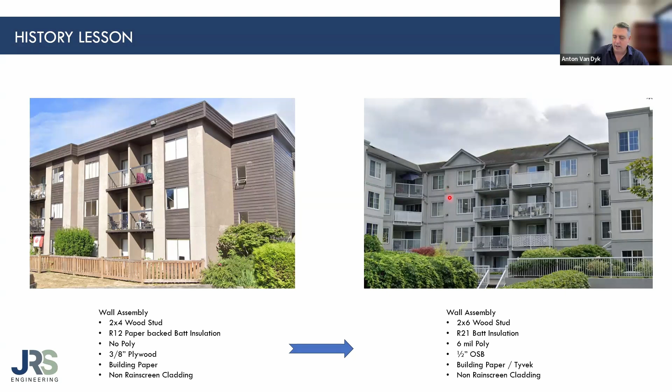What happened is in 1978 we had this thing called the Measures for Energy Conservation in New Buildings, which basically started looking at buildings saying, hey, we need to make them more energy efficient. Does that sound familiar? Does that sound like what's coming to our codes today?

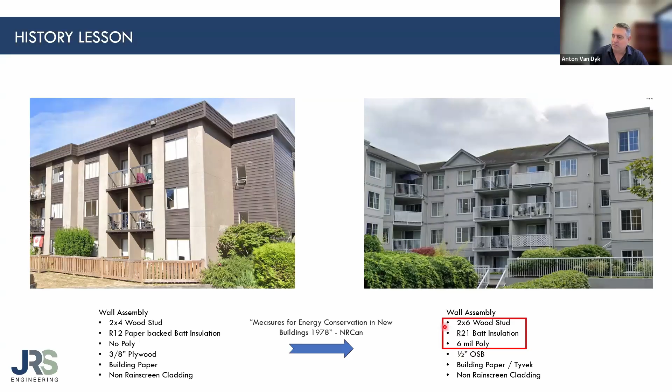In BC we have the energy step code, and the national code has the tier code coming. There's a similar transition happening where we're looking at making walls more energy efficient. We're putting more insulation in them, which in essence is changing the way the walls perform.

These two buildings are within probably 3 or 4 blocks of each other, so they're in the same climate zone. The building on the left has bad systems, but there's so much energy flowing through the walls that its drying potential is higher than its wetting potential.

I bring this up because we've had energy codes now in BC for probably 5 or 6 years that have changed how we insulate walls and deal with air barriers and moisture barriers. But the new topic everybody's talking about is embodied carbon.

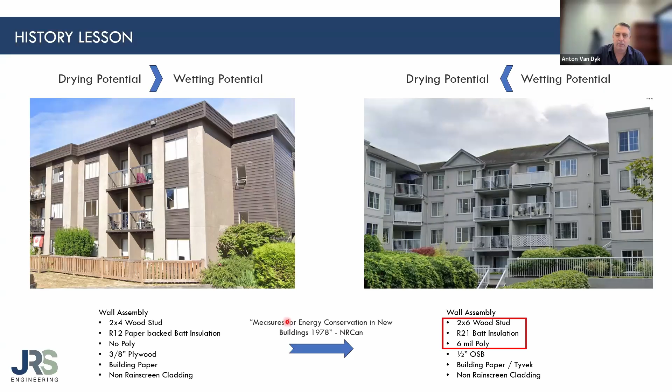When I talk to certain influencers in the world of reducing embodied carbon, my cautionary statement is: could it have an impact on increasing or decreasing durability, making a decision on a durability scale that we have to focus on? So the whole purpose of this slide is to recognize that one change somewhere can have a ripple effect down the road that we may not be paying attention to.

Looking at the history and evolution of windows—wood windows in buildings from the 50s, then into the 60s and 70s where aluminum starts to come in—you can see the transition of a window from a functionality perspective. Mullion thickness was based on operator balance weights, then with aluminum you could get thinner frames. Moving forward to today, windows have just gotten bigger.

The window-to-wall ratio has never been as extreme as it is in today's design. And we've got energy codes looking at lower conductive building materials, which generally pushes toward synthetics and plastics.

We're moving away from the stiffer, more durable products. Our windows have basically become an architectural feature, not a simple aspect of function. And that's where I start to dive into the idea that now they're architectural, so there's a whole new level of influence that an architect is having on the product you're supplying and providing for a building.

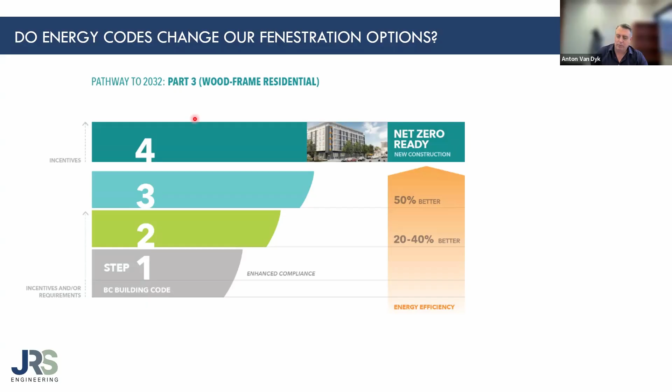It's triggering interesting, unique conversations. So looking at BC, and this is from the rest of the country, from the tier code, I'm going to use a part 3 multifamily wood frame building concept here. When we look at the step codes in British Columbia, we're hovering between step 2, 3, and 4. Why it's a range is code minimum in BC for multifamily buildings is step 2. Step 3 is the most commonly seen step in the actual specifications we see today, and some in step 4.

The reason we see a variable aspect here is it's municipally driven. Certain municipalities will adopt a higher than code minimum step code, depending on their perspective of climate resiliency, and it's also tied to zoning. So you get situations where if somebody upzones a lot for higher density, the municipality might say, well you can, but it needs to be step 4. I've also seen projects where CMHC has come in and said, we'll provide funding to build this rental building, but it must be step 4, not code minimum step 2.

It changes the dynamic. So what happens here is, in my traditional presentation for architects, I'll always ask the question: what is the U value and solar heat gain you'll find in this range? And now I've just added durability, because I think this is the next conversation we need to start having. So what type of products fall into this range?

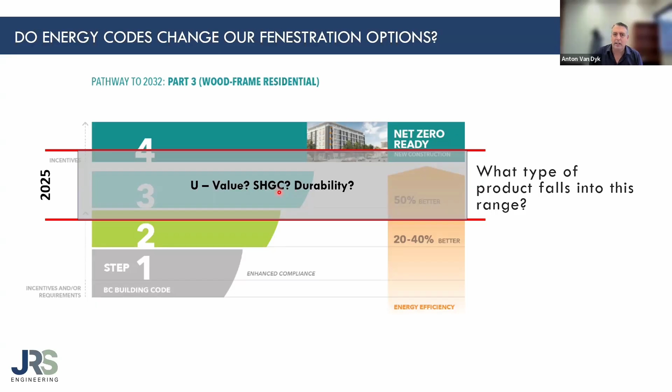You're developing it for relevancy for the next decade. This is the interesting conversation. What's changed from probably 20 years ago is the rate of change. Change has always been in front of our industry, but the rate at which it's changed is at a pace that we're not typically used to.

So getting into energy calculations and where we go with this, energy modeling, whole building solutions. If you've ever worked with an energy modeler on a project, you'll start to realize that they're dictating specific components that go into a building, in particular to hit the thermal energy demand intensity, which starts to define higher performance windows. So this is where you start to see the influence on why certain types of windows are being specified on a building from an energy perspective.

It's the energy advisor, and it's often done very, very early on a project, at the zoning stage. So you have, as a manufacturer, very little input and ability to provide feedback to design teams about what can or cannot be done. This is why, in my view, companies need to put a high level of effort into business development, not from selling what a product looks like, but from meeting with architects to update their understanding of specifications.

If you go back 25, 30 years ago, before Google, every architect had a spec library. They typically had a spec writer, and product manufacturers had technical representatives that went door to door into these architects' offices, updating the binders and informing them on what was new about their product and what they were doing. You had face-to-face communication. That culture's gone in our industry.

Architects simply Google. And I hate to say it, when you look at Google and AI, it pops up: yep, we have a solution for you. Okay, go design it. But the background research that needs to be done, this is where I get into this idea of how would you define the term high performance.

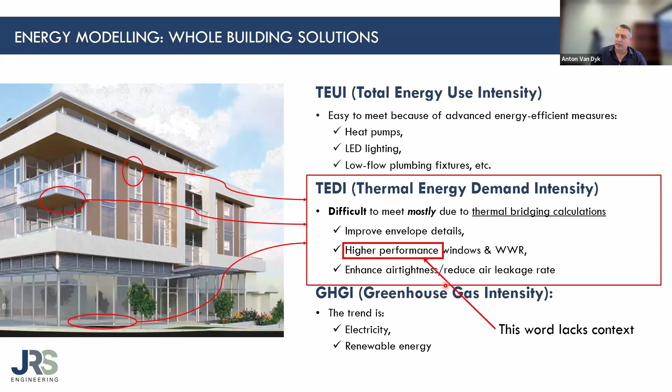So I did a presentation a few years back and asked an audience of engineers and architects, what's your definition of a high performance window? And I kid you not, one person said high solar heat gain, and another said low solar heat gain. So what is it? My answer is, what's the right window? What's the right window for the right building, for the right design, for the right implementation, for the right goal and the right expectation?

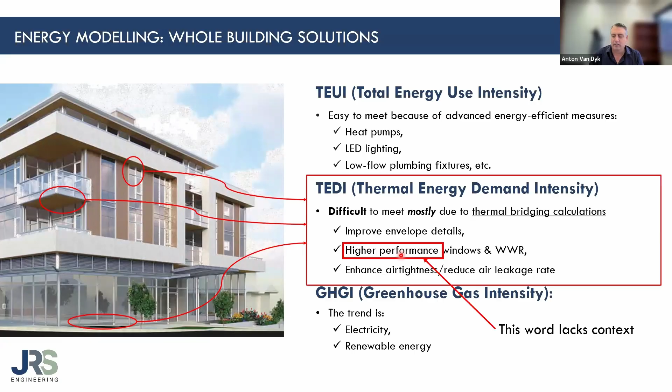So we got to start getting into this idea that high performance windows is not necessarily a single solution, because some people are going to start pegging low embodied carbon windows as high performance windows. But on a 20-story high rise with high wind loads, is that appropriate? Could that be appropriate? And what does that look like? So we have to look at it in a world of context.

I did a post a while back on LinkedIn, and I got this really cool comment back from somebody regarding energy codes. It talks about the focus of total energy use as a target for design and construction—that's basically the definition of energy codes, energy step codes—creating a significant number of less than optimal choices. It's acknowledging the fact that the products we're used to using today may not be relevant for the future.

Knowing how much gas a truck uses in a year does little to understand what load it can carry up a hill and safely descend it. And if you've ever tried to tow a trailer through the Rockies, you'll know it's important what vehicle you have towing that, from a safety perspective. There's a number of times you can drive through the Okanagan or the Coquihalla Highway here in BC, and you'll pass a pickup truck with a flipped over trailer on the back because it was basically not capable of doing it.

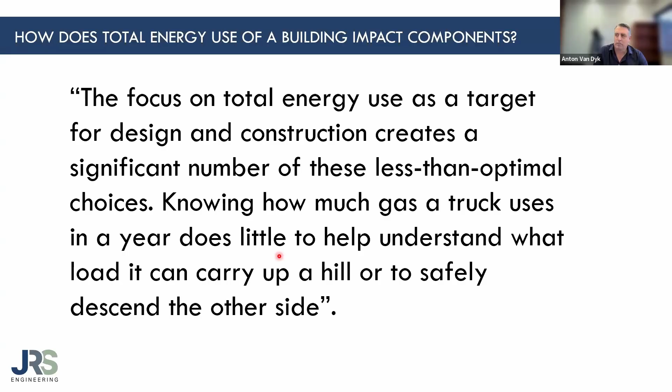This is acknowledging the idea that total building energy code calculations do nothing to understand the products we put into certain components and what happens to their level of durability. It might work for a calculation—we've all seen this with solar heat gain. It works great in calculations for total building energy efficiency, but it may not work for the component. So what's changing? What do we have to factor in?

Being born and raised in BC and growing up in this region my entire life, I can assure you that in the last five years, we've seen events happen in British Columbia that we have never seen before, that I've personally never experienced in my entire life.

So key aspects—I took Victoria's average temperatures, highs and lows: an average low of 3. Kamloops, an average low of 5. And then I get into the extremes.

In June of 2021, we had an interesting event we called the Heat Dome. We've attributed a significant number of deaths to it. It triggered code changes and ideas about how to regulate temperatures in houses. Those of us in the window industry know you don't always have to put air conditioning in a home—you can deal with it with low solar heat gain glazing. When I heard on the news they were trying to codify air conditioning in buildings, I was frustrated, because there are more pragmatic solutions with glazing systems and shading. But not everybody wants to react from that perspective.

We saw up to 40 degrees in the Lower Mainland and Victoria—oceanfront cities that generally have mild, temperate climates that don't swing that high. And in the interior of British Columbia, we hit 50. I was actually camping with my family in that range when it hit 50, so I personally got to experience 50 degrees. Not a fun temperature when you're in a tent trailer with no air conditioning.

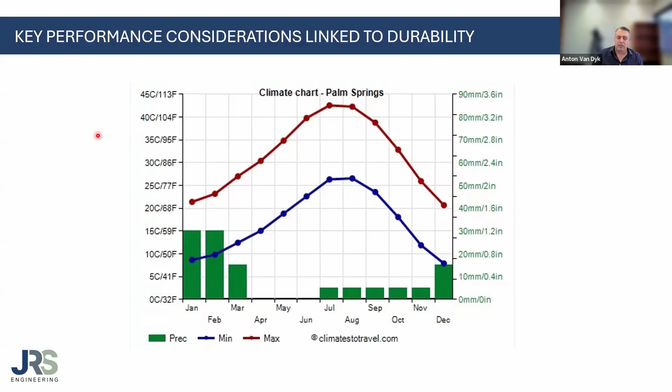So I'm going to bring up Palm Springs—I'll show a slide after that connects the dots—but we are getting Southern California-like temperatures in Vancouver, which in my entire lifetime we've never experienced. That's a new thing. This is the change upon us that's going to start to factor into durability and how the things we put into our buildings are going to perform overall, looking at it from a pragmatic, holistic, big-picture aspect—not just a calculation that software tells us will work.

So examples of performance considerations linked to durability—we're going to get into the guts here now of specific examples of what we're seeing today. These are actual real-life situations that are occurring, from multiple projects.

They're reflective of multiple products. It's not discriminatory towards any specific aspect of a manufacturer or anything. I just want to get that out there. We have to have this conversation. Architects, engineers, and specifiers who are responsible for the material they specify on a building need to become aware of the limits and boundaries of that product based on the environment it's being put in.

The best way to look at what works and doesn't is to look backwards a little bit in the last 5 years, to see, in those extreme environments that the products have gone through, can we use that as an example of what we might face into the future?

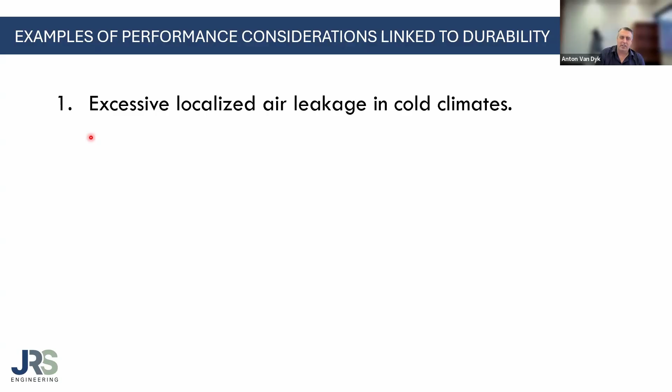So the first one I like to look at is excessive localized air leakage in cold climates, and high solar heat gain glazing damaging window frames.

This is a bit of a regurgitation of a previous tech talk, so I have some content there. But a lot of architects and engineers are not aware of this issue. When I share the image from a previous tech talk with energy advisors on what a 0.4, 0.45 solar heat gain coefficient can do to a window, they're shocked. They have no idea this is a possibility, which is something to consider when we start interacting with designers.

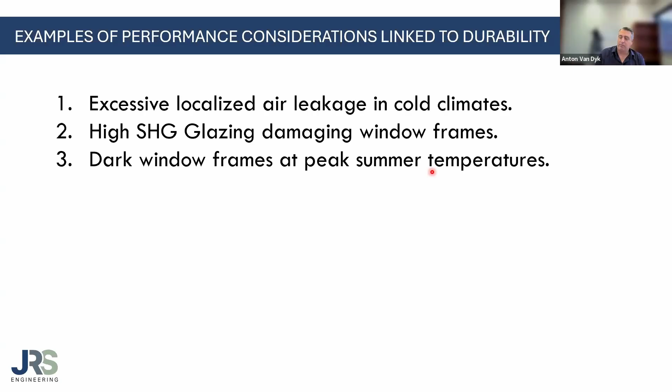Dark window frames at peak summer temperatures — this is going to be a big part of the conversation. This is because windows have become architectural versus functional in our transition through the processes. What happens when you put a dark color on a window frame? What type of window frame is it? What is the color? What is the material? And what happens at 40 degrees Celsius is really the big question.

I have two other topics I want to open up into conversation, but this thing's going to turn into 4 hours if I get into this. But we need to start having more conversations about the use of Surface 4 low E in cold climates in lieu of triple glazing. What is the boundary? What is the limit of Surface 4 low E from a condensation perspective? That is a future conversation.

There are too many designers and specifiers in the industry who are black and white on this — don't do it, or do it. I put it all in my house, because I was really frustrated with one designer who was trying to influence that Surface 4 low E should never be used. But in a mild climate, it has very significant relevance.

And in the conversation about embodied carbon, would a Surface 4 low E be better than triple glazing from a carbon perspective? I think so, because it's less glass. But in cold climates, we have to be careful. That's where I see the common mistake made — oh, we did that on a building in Vancouver, but then we do it on a building in Kamloops where we start seeing minus 25. So those are the kind of things we need to know — what is the boundary.

And there are actually tools we can use now. Cardinal developed a chart and presented it — I remember seeing it like 15 years ago, on how to determine center-of-glass condensation temperatures using different low E coatings to determine condensation. Then you use that with a psychrometric chart, do your dew point calculations, and you can predict condensation scientifically.

Interestingly enough, I was reading a bunch of thermal modeling reports from Intertek yesterday, and they had a disclaimer about condensation resistance — being it's a simulation, not an actual result, and it doesn't factor in convection currents, airflow, and all these other things you work with when it comes to condensation predictability.

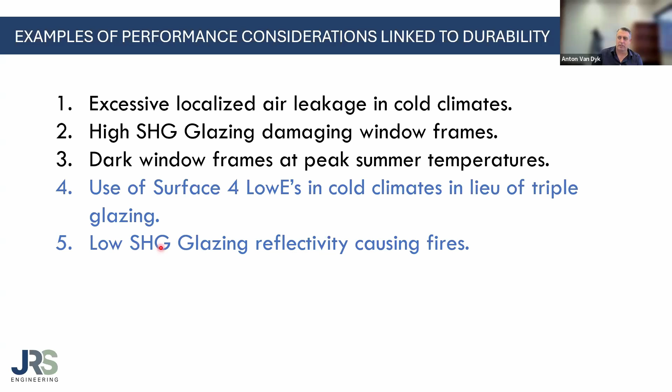So first, excessive localized air leakage at peak winter loads. Common issues with doors, and I'm really going to amplify the swing door industry issue, something I learned when I transitioned work into the Calgary market, where you see sustained cold temperatures. With French doors, and in some cases patio doors, you may have a situation where your door tests and meets an A3 air leakage level. Great. It meets A3, it's got an air leakage rating of less than 0.5. We're all good, except 80 to 90% of the air is leaking through one small location.

And that's what I think most everybody looks at, the holistic performance aspect of the product. But what if all of the air leaked through the astragal at the bottom of a French door in this one location? For those of you in cold climates, you probably already know the answer: customers complain they got ice buildup in certain locations of the door and the door won't open or close. So this is a similar conversation about how industry standards don't necessarily provide us with the understanding and logic that could come with durability and the expectation of durability in that specific climate. Not a huge conversation, but something to pay attention to when you're selling a product from a mild climate into a more extreme colder climate.

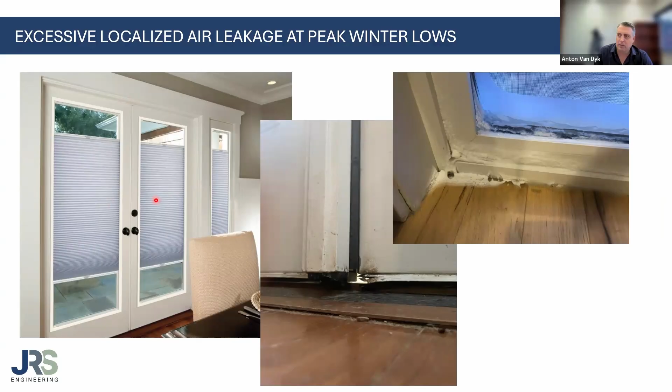What I learned in the Calgary market is a lot of developers will put double outswing French doors in homes, and then five years later the homeowner will take it out because they don't like it. They'll put a solid mullion in, do a fixed panel and only have a single operable. They won't use the French door because there's so much localized excessive air leakage with French doors in cold climates.

They don't work. Going back to this conversation and the story I like about this one - I'm going to paraphrase it because I don't know the exact details, it's all second, third hand information - but this idea that this home is built by a developer.

It's built and sold and designed as a high performance home. Let's say it's got solar panels, extra insulation, it's in the upper levels of the step code, and it's got high solar heat gain. So the design might be 0.40 in the energy calculations, but most of you know, can you actually get a 0.40 solar heat gain window? No, you're probably selling a 0.45, a 0.48. In fact, some windows I've seen come through at about 0.52.

So the energy advisor might have said 0.40 or higher, thinking higher is okay because more heat in the winter, the better. What's wrong with that from an energy calculation perspective? But the more heat coming through, is that okay for the window?

So what happens here is the homeowner moves in and says, hey, my air conditioning is on from May to October. This is odd, my home is overheating, I can't do it. They start looking at their energy bills in the summertime and go, wow, we're consuming so much electricity for air conditioning.

And then someone comes along and says, hey, we can sell you these heat reflective blinds that we can put on the inside. Or in my own personal case, my wife used to work the night shift in the ER and she'd come home at 7 in the morning and sleep from 7 till 1, 2 o'clock.

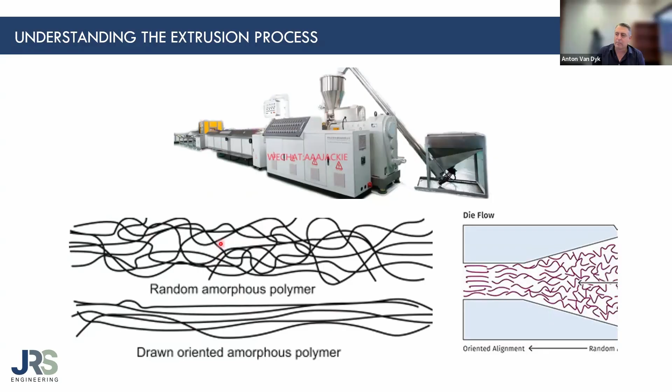And so what happens when you heat it up to a certain temperature? There's melting temperatures, there's softening temperatures, there's that plasticization temperature that comes into it. And people will use terms like reversion, replasticizing, and go from there.

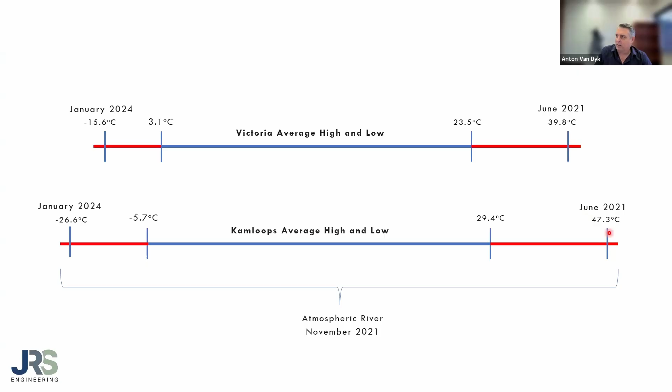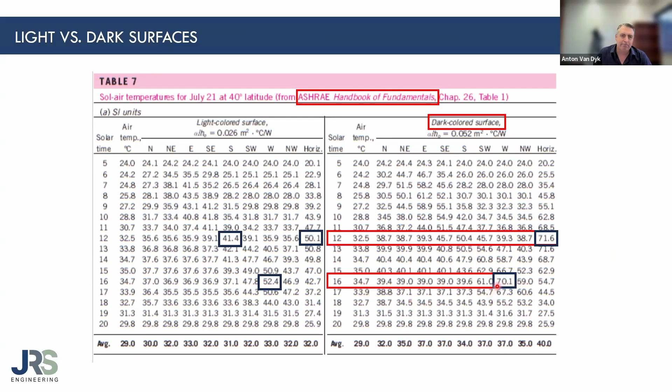Now, what happened in BC is we started seeing 40-degree temperatures in the Vancouver region. In the interior, we started seeing 50. So this chart is at 32.5 and 35 degrees, so it caps out—it's not giving us the full spectrum of what can happen, but we could probably plot this on a graph and use it to project what it could be. So what happens if at 35 degrees we're hitting 70, at 40 degrees could we be hitting 80? That's really the interesting conversation we need to start having, because these environments are existing in our climate.

What a lot of engineering firms are doing, and it's really big in British Columbia, is driven by a lot of the warranty insurance aspects that we deal with because we had building envelope failures over the last number of years. So we have a warranty insurance criteria linked to certain timeframes, and the big one is a 5-year warranty component linked to water ingress. Our firm, for example, will get hired by condominium owners and we'll come out and do that 5-year warranty review.

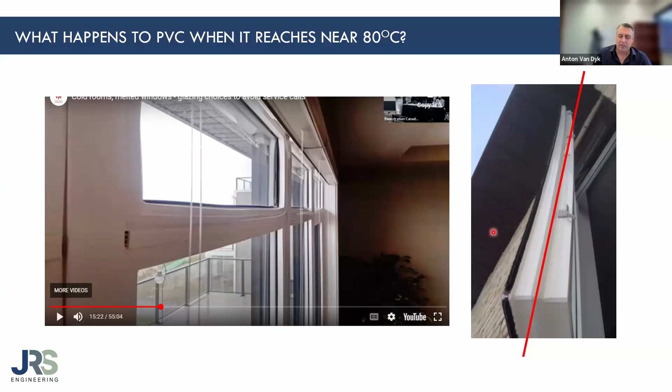What's happening is the window heats up on one side but not the other. You have a controlled condition on the inside and an uncontrolled condition outside, getting 40 to 50 degree ambient temperatures. That heats up one surface, the vinyl reverts, releasing tension in the polymer, causing it to shrink. This causes the sash to bow in this direction, which makes the weather stripping lose compression and gasket seal in this location.

This is where we start having the conversation about durability versus performance—can we link the concept of whether the window is performing for air tightness and water tightness as intended once it goes through a heat event like we saw in June of 2021?

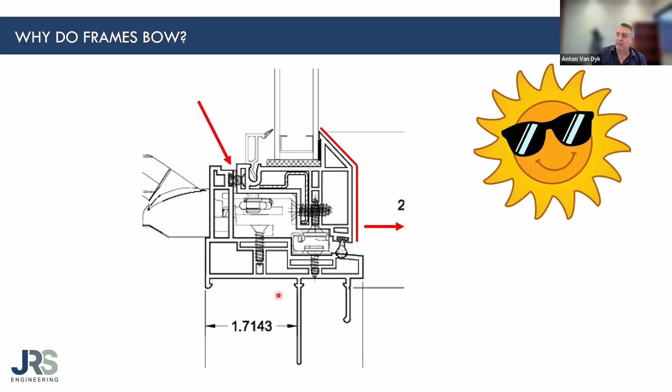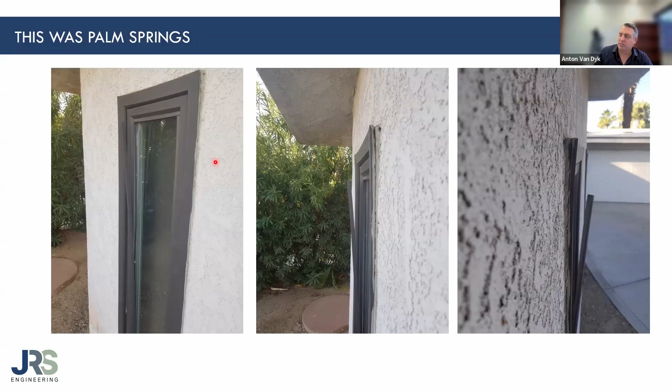I think an important part of this is it's not about duration of impact—it's about whether it got exposed to that temperature, and how long a product can be exposed to that temperature is an interesting question to dig into. Is there a sustained component to it?

How do we fix it? How do we address it? How do we prevent it? And is this a conversation about durability? This is where I define durability as relating to air and water performance—would this have an impact on the air and water performance of the building?

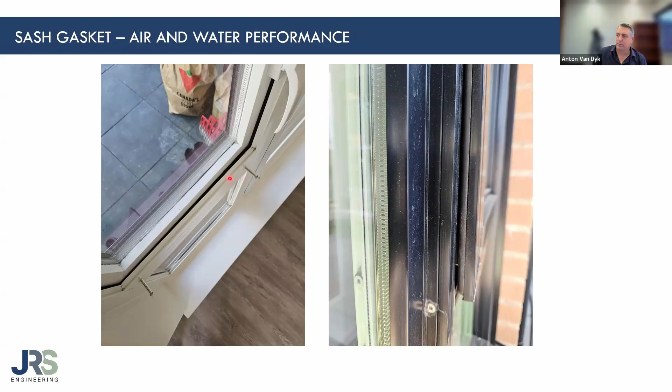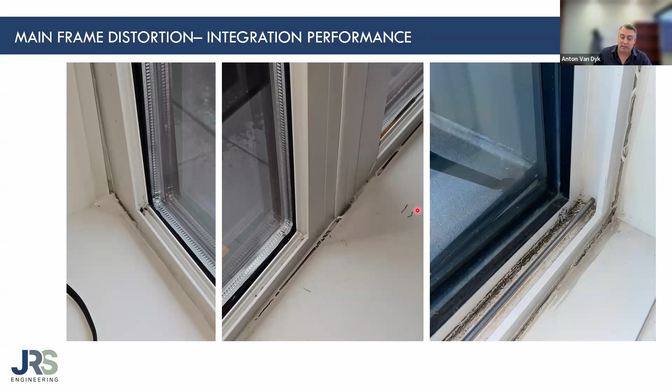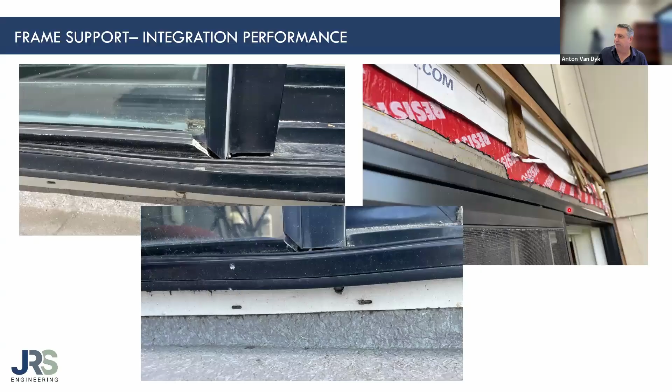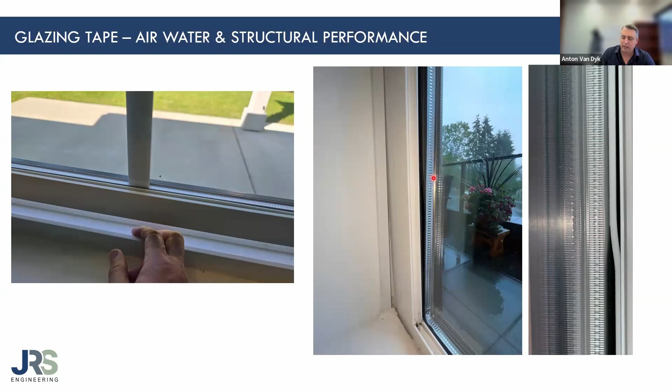In situations where the window has to meet guard load, in this particular project there's a concern because calculations were done to determine whether these windows would currently meet guard load. They don't. The piece of glass is 4 feet wide by 6 feet tall, and it's an occupied building. If someone were to lean up against the glass, there's a high probability the glass could fall out of the frame because the glazing stop would not be considered structural. The glazing tape is actually acting as a structural adhesive from the glass to the frame.

This is a downward version of that vertical slider where the glazing tape's lost adhesion, and you can see the bow in the frame, and it's causing the glazing tape to pull off of the frame.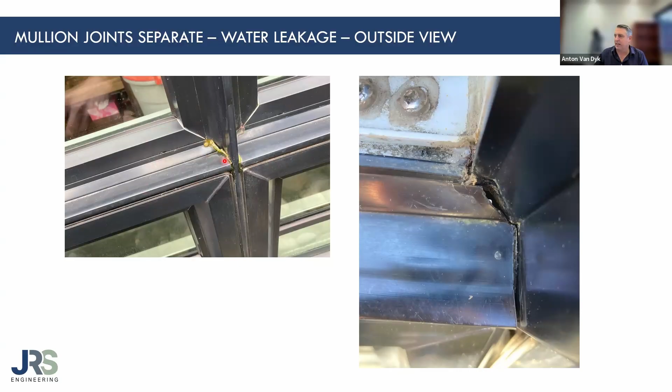In this case, a water test was done after the fact. The windows are relatively older, but it's trying to determine whether or not that gap opening up is the cause of what's going on here. You can see in this situation, on the inside the gaps are tight, but on the outside the gaps are open.

This is the same window, but you see the staining, the rust staining, which is an indicator that water's getting into the mullion where there's steel, causing corrosion, and then water's dripping out. In this case, we drilled a hole in the underside of the mullion and water came pouring out.

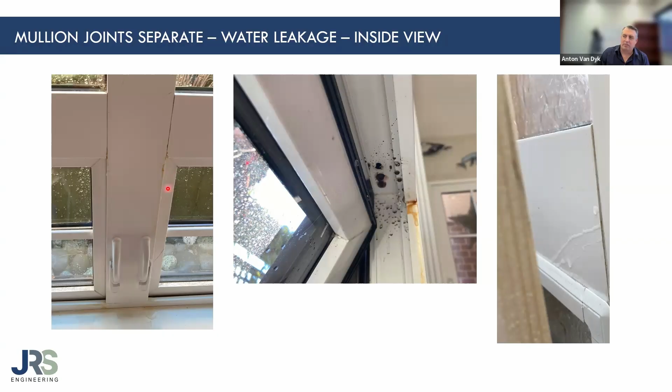And this is the active leak occurring through the mullion during the actual water test. So this is where we start digging into the idea of whether these issues of durability and performance are linked.

A comment I get from a lot of people is this was old technology. Some of the black on these windows was the technology used 5, 8, 10 years ago. This is a 3-year-old window. When I started talking about this, a colleague of mine said, 'I just bought a unit in a complex in North Vancouver, and these are the windows in my building, and the building is only 3 years old.'

So we're starting to see situations where product that hasn't gone through the heat dome, exposed to 40 degrees, is still reaching a high temperature causing this level of distortion. If you put your hand against this, the air leakage you'd feel on a -10 winter day is quite excessive. So you can link the connection between excessive localized air leakage in cold climate with potential sash bow occurring from summertime heat, and that connection between the two.

So what can change? What do we need to do to address this? And where does the conversation need to go?

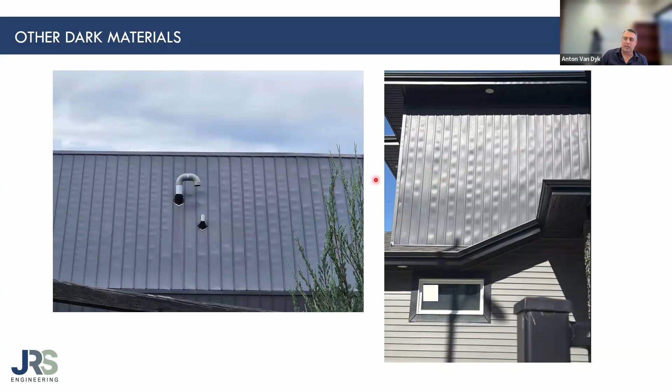So to wrap this up a bit, how do we specify finishes? How do architects determine the finish of a building? Is it a color? Is it a material? Or is it a system? I think this is starting to open up the conversation about durability, because if you're specifying a finish as a color, you're not talking about durability at all. And I would say that is the current state of our industry. We're specifying everything as a color. We have to start focusing on a material, or as a system, and get creative with what that system is.

This is where we start talking about the next decade being upon us. We're going to start seeing extreme temperatures, in the cold and in the hot. So what is the system that we're doing that is going to be able to manage this? This is where I go, how we fixed leaky condos in British Columbia. We didn't make buildings stop water from coming in. We said we're going to manage the water that comes in. We're going to expect buildings to leak, but we're going to drain it. We're going to increase the drying. We're going to flash it out, and we're going to address it.

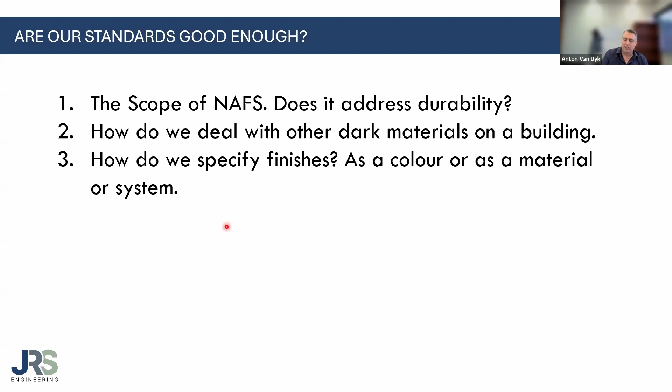And it became a system, not just a material like a space shuttle that's going to stop every ounce of the environment from coming in, because we know that's absolutely impossible, especially from a cost perspective. So focus on this idea of a system.

So when we get into color, how do we specify windows? Well, the color of a window is generally specified at the development permit stage. When I talk to specifiers and ask how they're determining the right product for the building, a lot of times they say they depend on the window manufacturer to provide feedback on what their product can and can't do. Then I talk to a manufacturer and ask how they decide what product to sell for that building. They say, if an architect specifies it, we'll provide it, because we assume it's going to meet their expectations for the building.

But what happens is we're picking the color of the siding and the windows at what we call the development permit application stage. How many window manufacturers do you think are brought into that conversation at this stage? This happens probably 3 to 5 years before a building is even considered for its functionality, materials, and components.

So the color's set, and it's linked to marketing and housing trends. What's the biggest housing trend right now for bathrooms? Black faucets on everything. What was it in the 80s? Probably gold. What was it 20 years ago? Satin nickel. So housing trends are dictating a lot, but housing trends and marketing have no conversation about durability. Back in the leaky condos era, more money was spent on marketing condos than on the conversation of envelope durability. That was a red flag in the industry, and we have to be careful when these conversations come up.

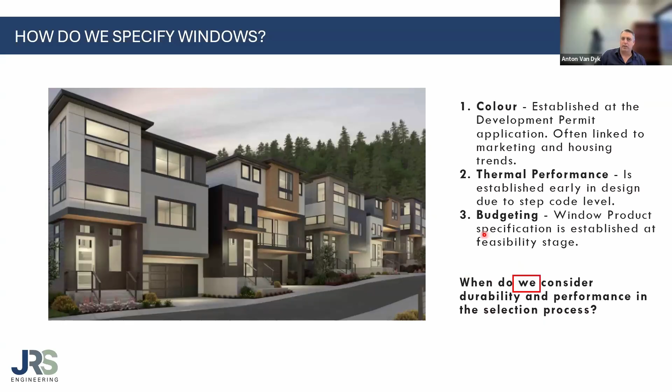So, can we test for this? In conversations I've had with colleagues who do a lot of high-rise curtain wall, window wall projects, 20, 30 stories, with products coming from all over the world, newly developed products, we have this thing called PMU testing in the commercial sector, where someone will spend $100,000 building a 2-story window wall system, bring it to a lab, and do a whole gauntlet of tests, from environmental tests to thermal cycling, seismic tests, testing before and after. So you can basically put a product through it.

Interestingly enough, there's an AAMA 1506 test that deals with laboratory heat buildup effects on fenestration products. It is literally identifying exactly what we're seeing in the industry with products that go through this issue. You have a situation where windows are tested at a 24 degree interior temperature, a 43 degree exterior temperature with an infrared lamp, and the result is to measure the amount of bow that occurs in the frame.

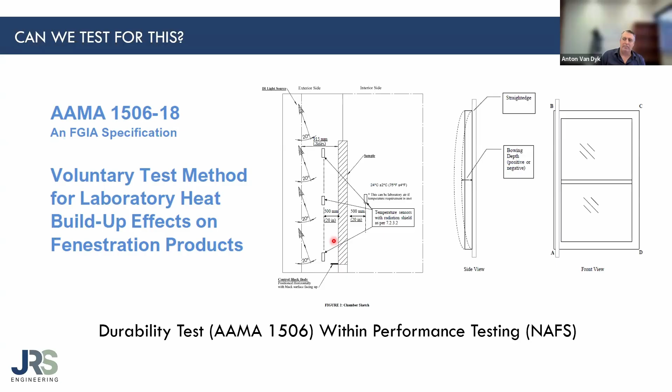So one of the things we're looking at is a possible durability test would be an AAMA 1506 test combined with a NAFS test, which allows you to combine the two together so you can basically put a product through a potential environment and then do a test after to see what impact it has on the overall performance. This is something that is starting to be talked about at the engineering level when it comes to selecting products for performance.

We're currently in discussion with Natural Resources Canada and Fenestration Canada to start developing guidelines around durability. This is something that's starting to heat up in conversation. The idea here is to look at, in particular, carbon reduction—what happens with carbon reduction when it starts coming into our code, and how does that impact overall issues that we're starting to see? So that wraps it up.